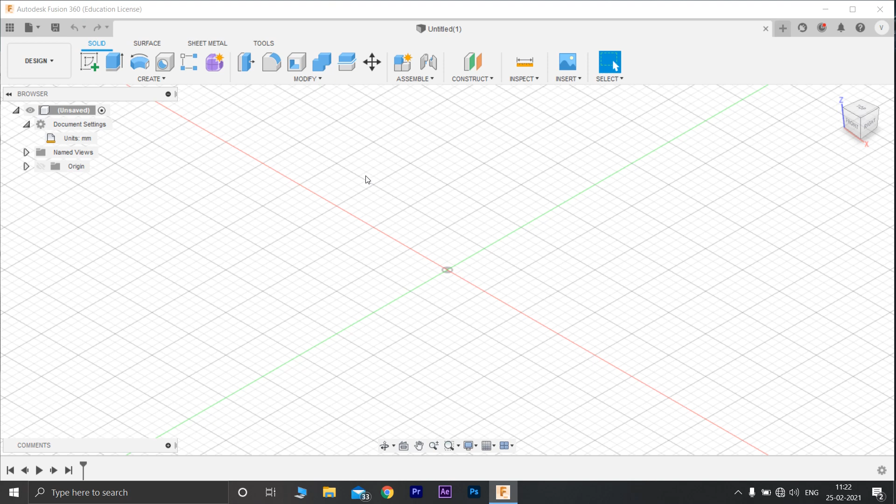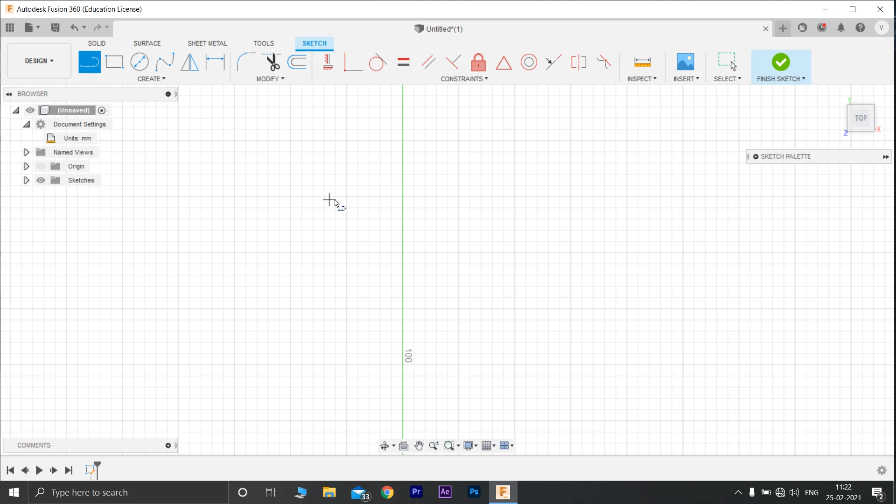The first setting you have to do is go to document setting and check whether the units are in mm. Now go to create sketch and select the top view, and move to the point above the center point. Next, go to line and create a simple sketch like this. Press escape and do the same process on the other side.

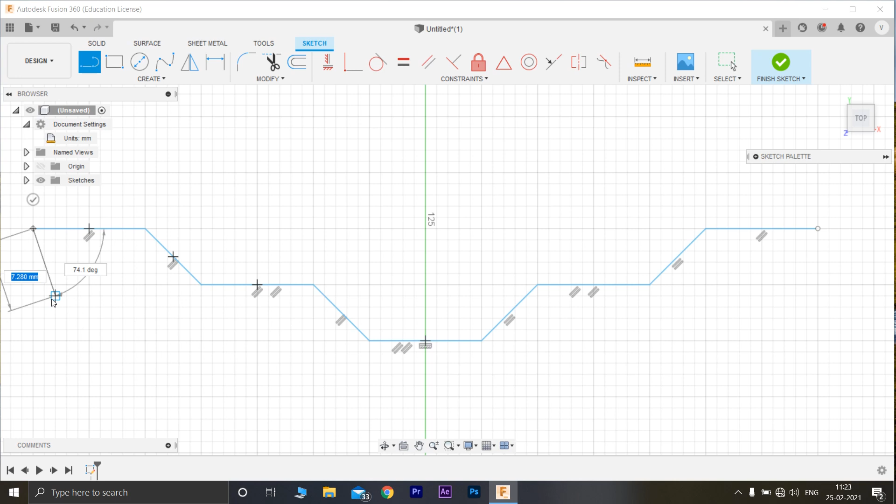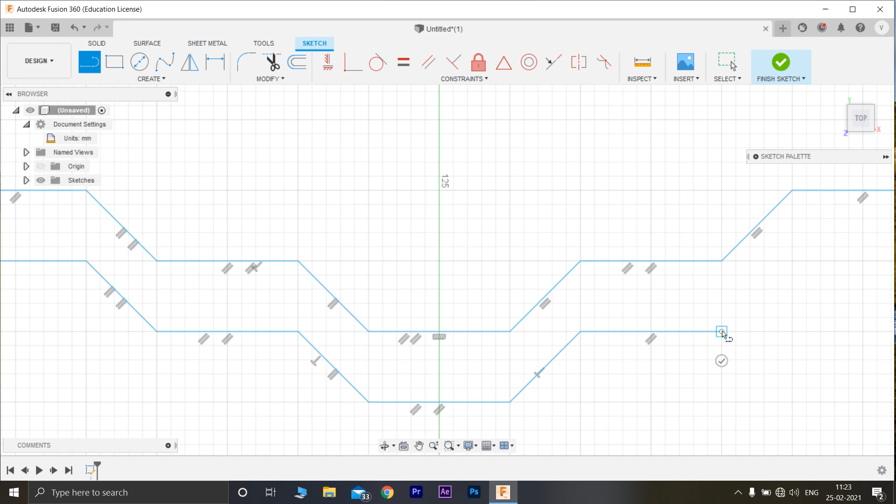Just repeat the pattern you did before. So what you have to do is go to revolve. The entire profile is selected. Now you have to select the axis of rotation, so you give this red one, that is the x-axis.

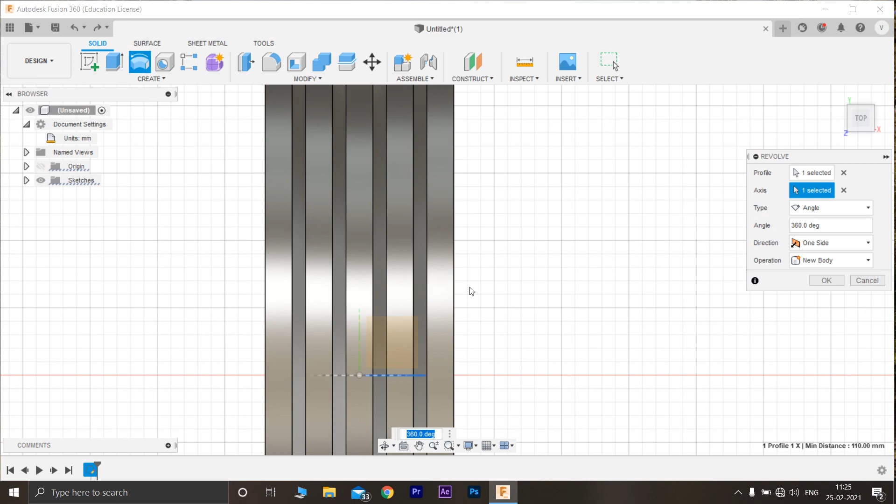Now you see the rim is created. So the outer alloy is now created. Yes, now the outer surface of the alloy is created. This is the top view.

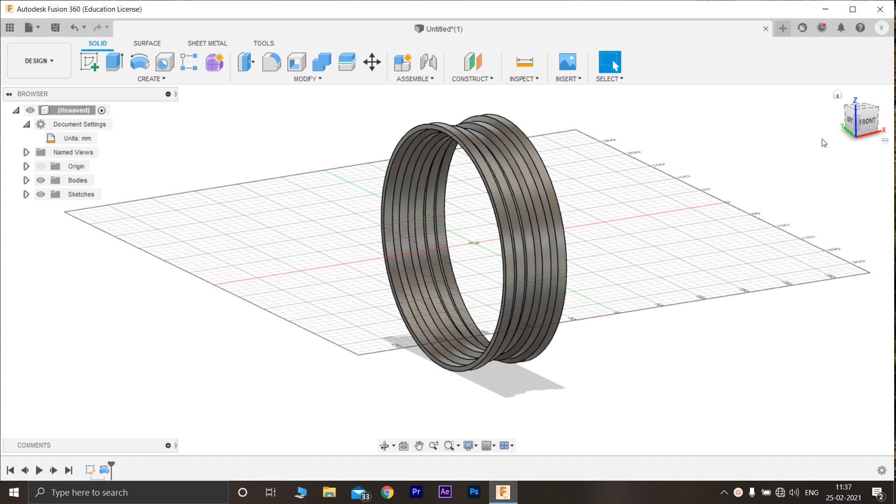Now what we have to do is design the inner parts. So go to front view, and go to solid and create sketch. First select the front view, that is this view, and now go to create and arc, 3-point arc.

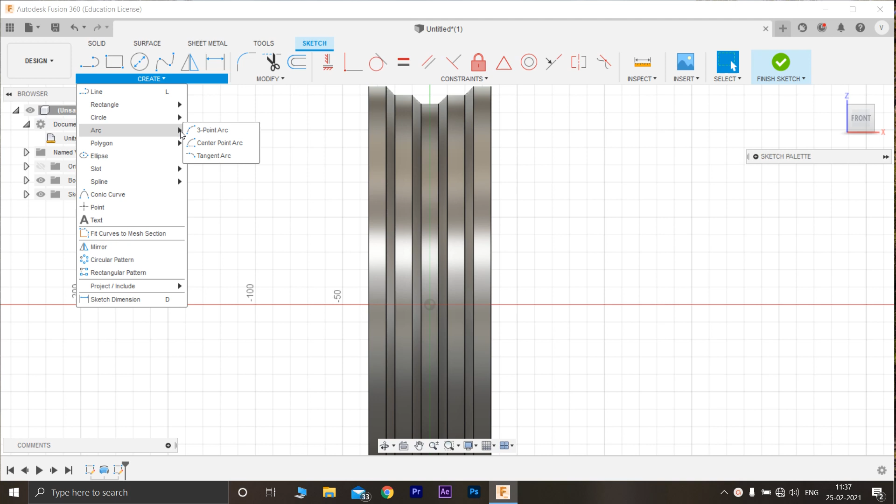Select this point, and now the center point will be -- don't give it too much so it won't look nice, so give it like this, the center. So the arc will be like this.

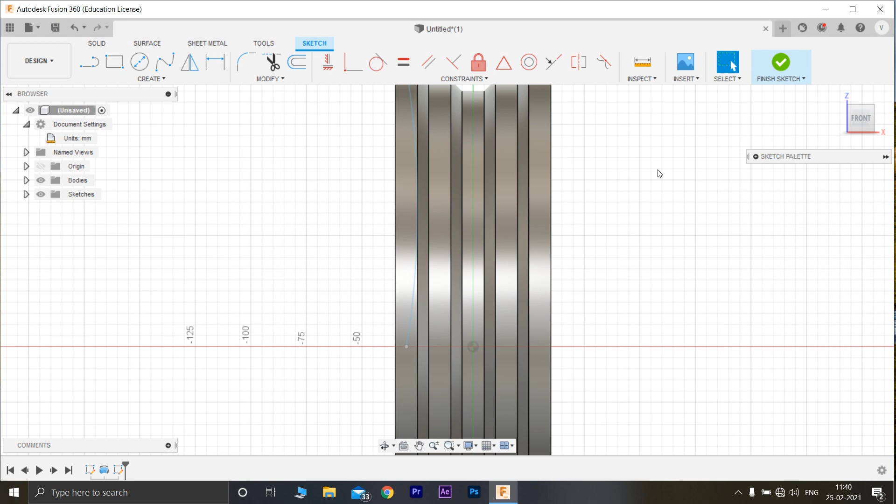So the next step is go to simple line, and draw a simple line like this and connect it, and press enter.

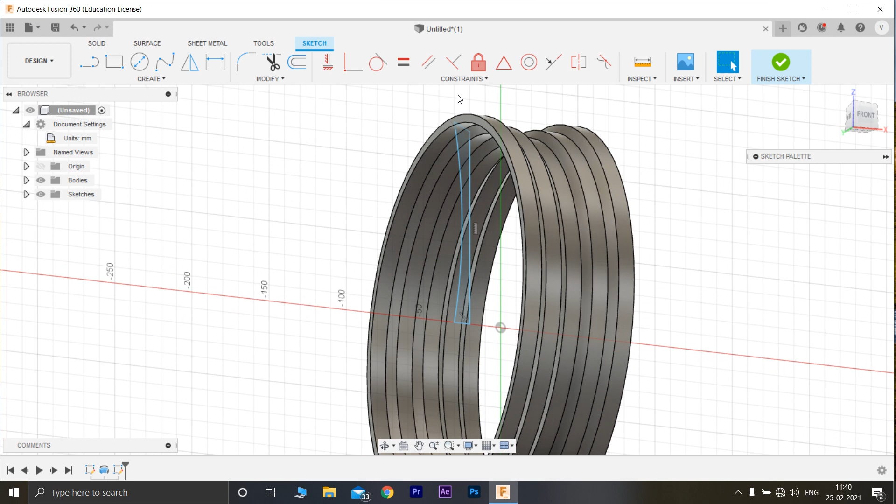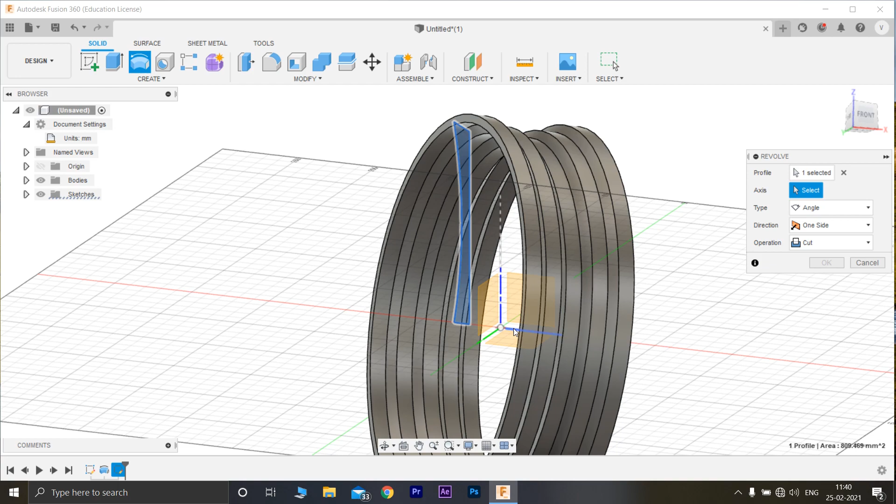Now select this part and go to revolve. The surface is selected. Now we have to select the axis of rotation, this red line, so that will be like this. In the operation you have to give it as new body. So see that it will be like this, and OK.

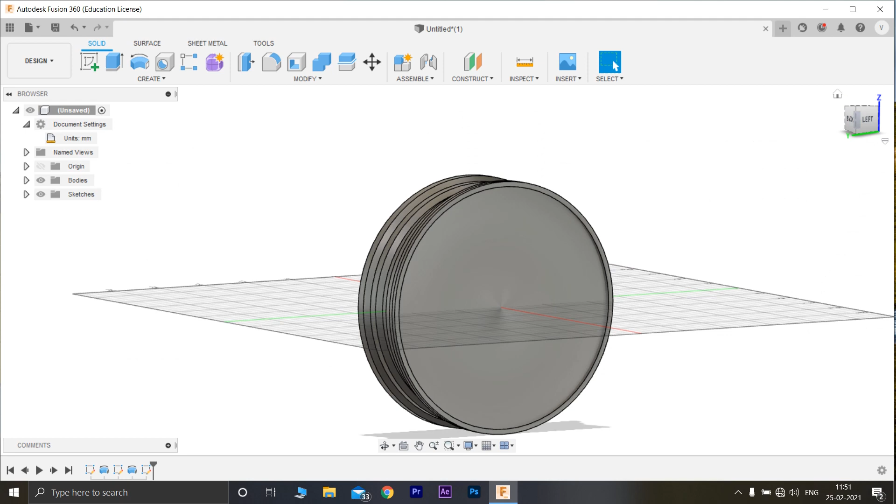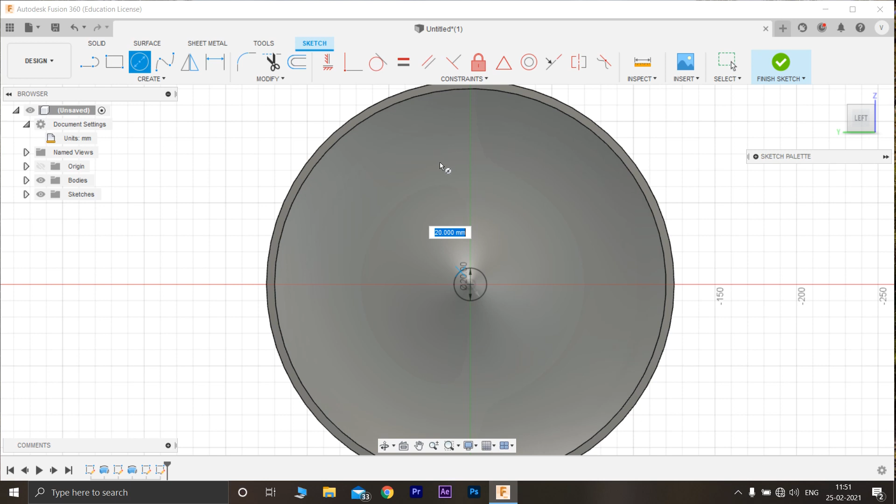Now go to this view and create sketch. I'm going to sketch on this view. Now go to circle and select the center point, and draw a circle for 20 mm. Now again go to circle, select the same center point and draw a circle for exactly this amount, and press enter.

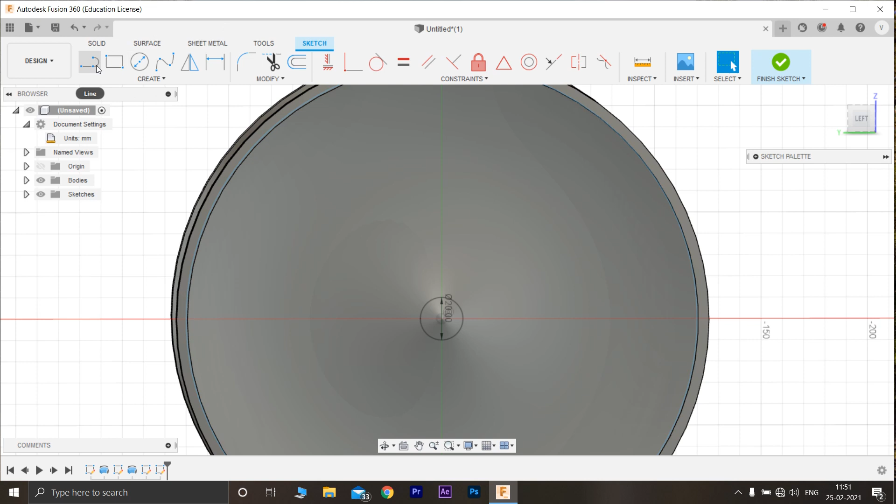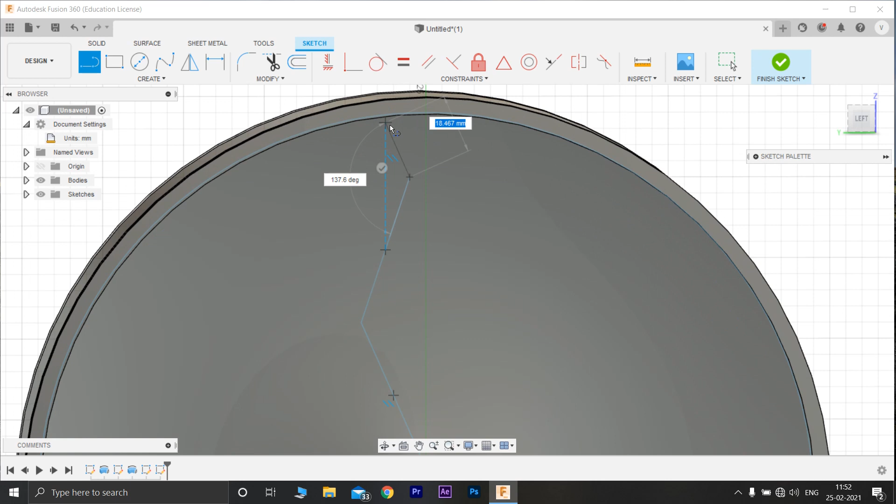Now the next step is go to line, select this point, and create a random sketch for the line. Press enter.

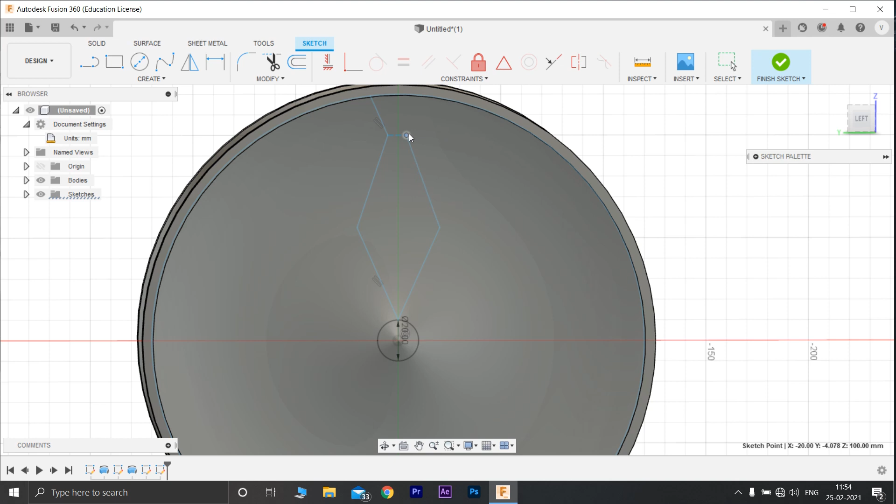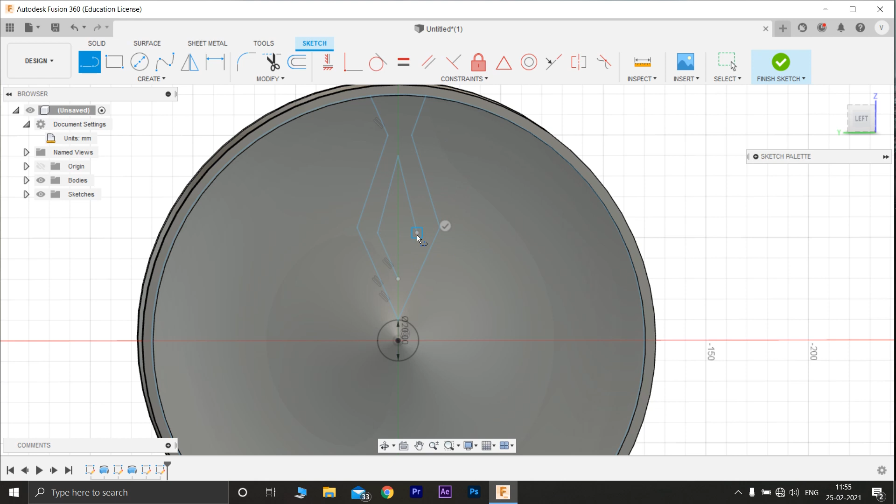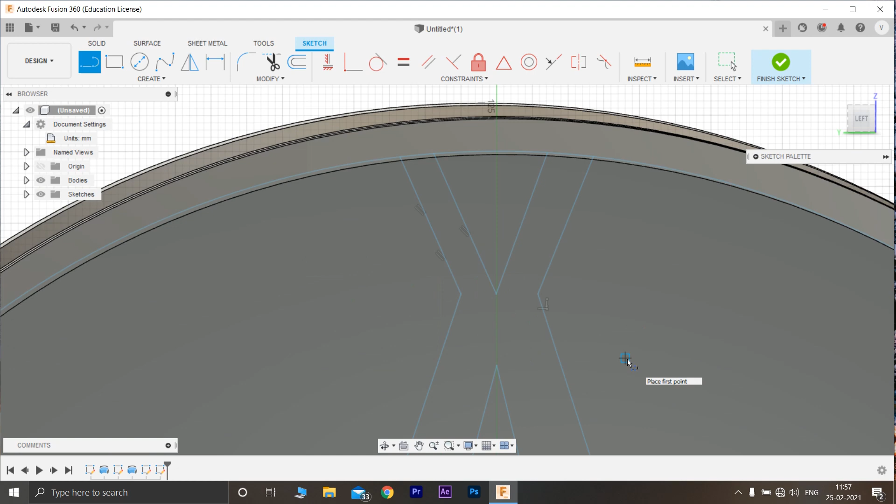Create a sketch like this. Now the next step is go to create sketch, select one point, go to line, and do it like this.

Now the next step is go to finish sketch. Make sure that these lines meet the outer circle so that it will be easy when you do an extrude.

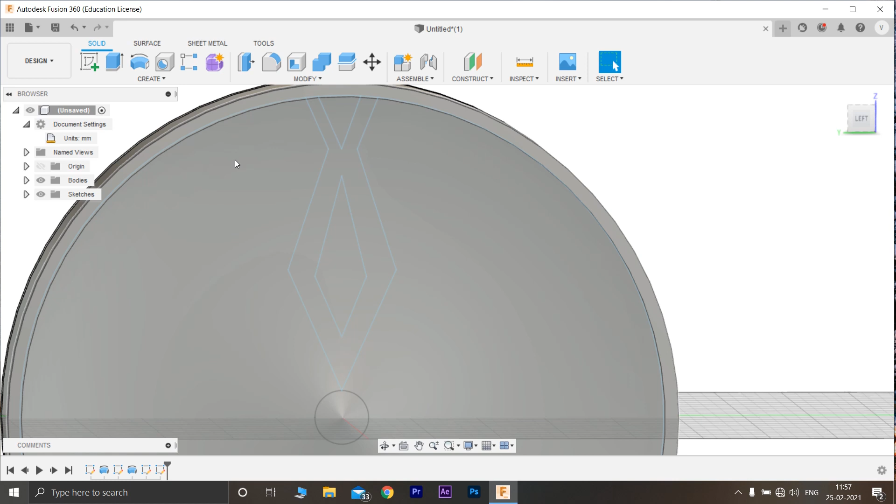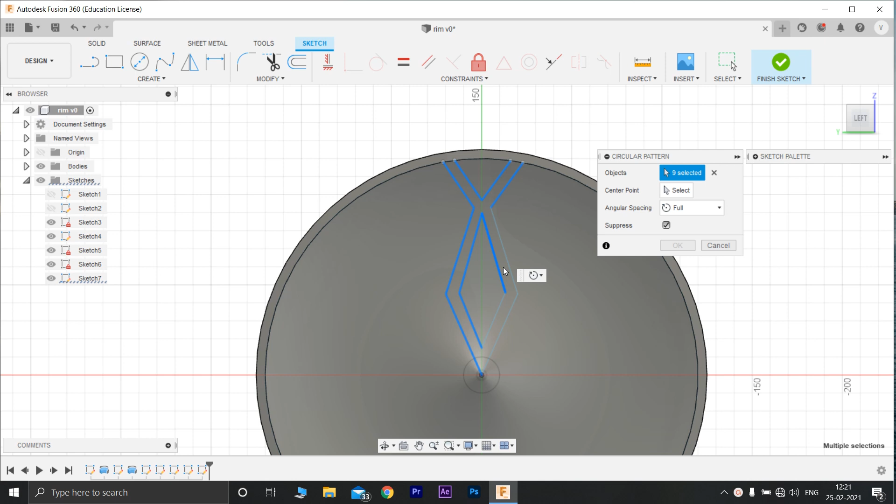Now the next step is go to create and select circular pattern. A pop-up will open like this. Now select the object, select all the lines that you have created. So now the circular pattern of 6 quantity is created.

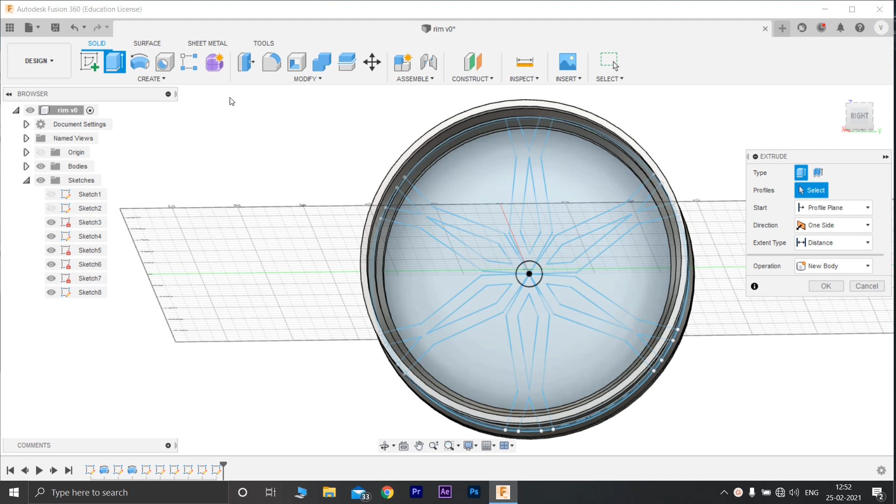So the next step is go to finish sketch and go to extrude, and select the surfaces and profiles that you want to remove.

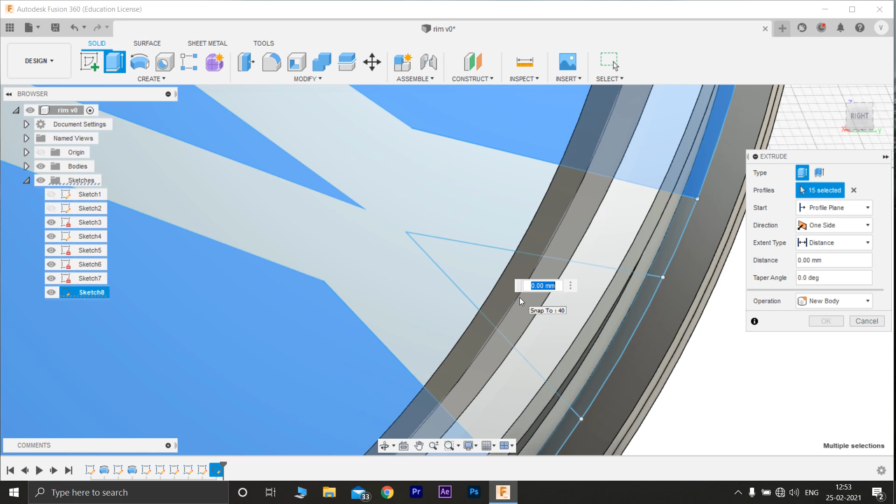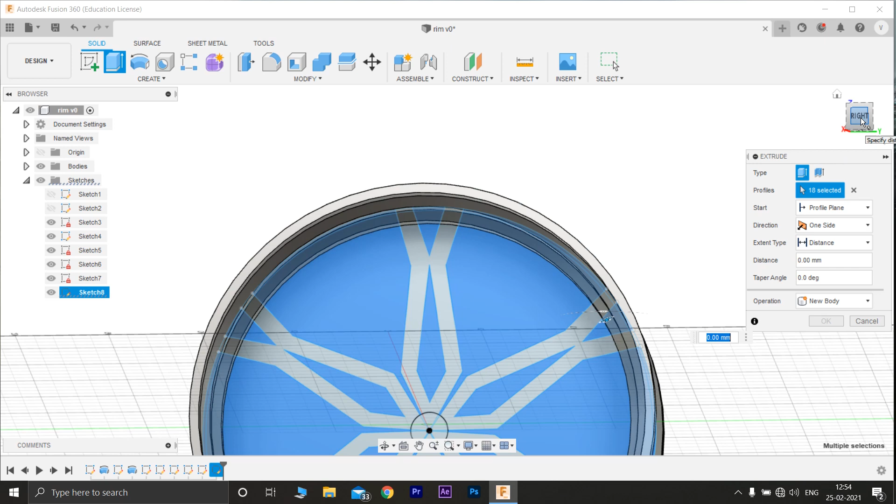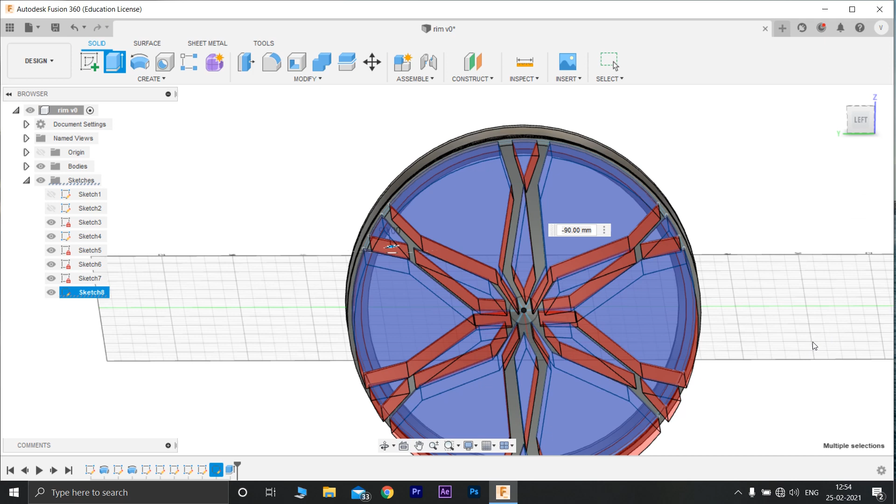Once you select all the surfaces, you have to set the operation as cut and extrude it outwards like this. Press OK. So this is how it looks.

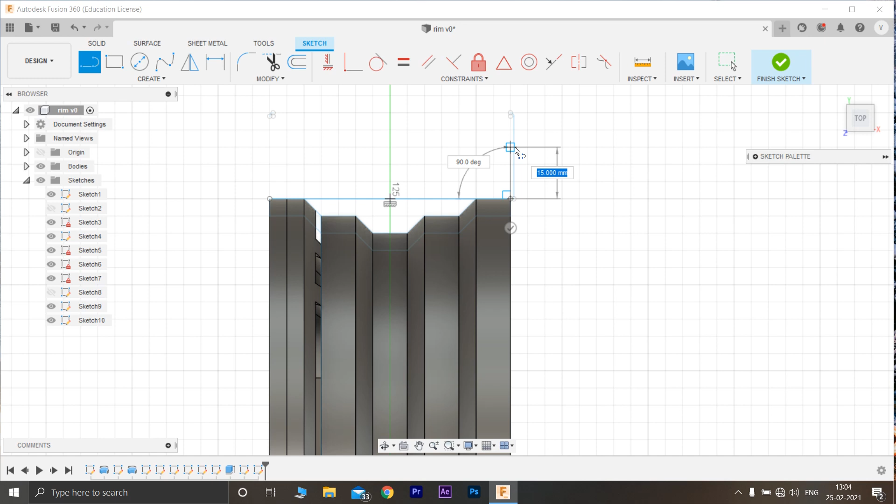Now the next step is go to the top view and go to create sketch and select the top plane, and go to line, and from this point to this point create a line, and again create a line like this. Press enter.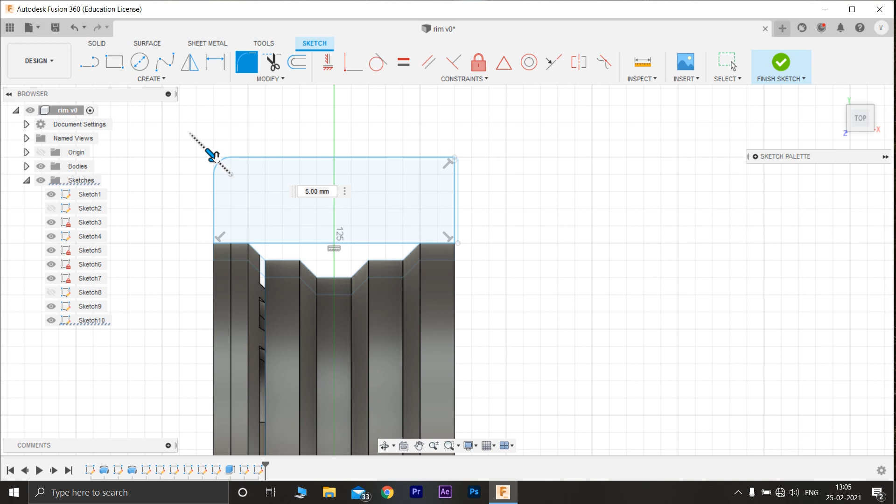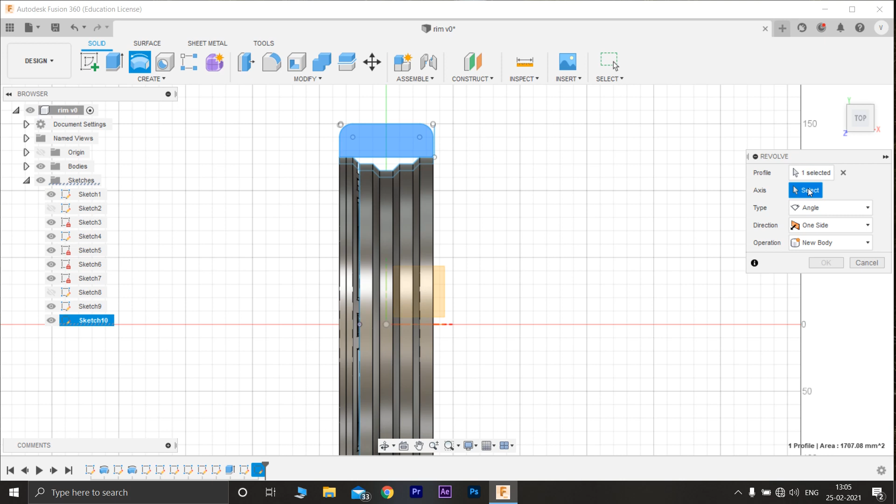Go to fillet and select this plane and apply fillet. Press enter. Now select finish sketch and go to revolve and profile, select this one, and the axis should be this red line, that is the x-axis.

Press enter, so the surface will be created like this, and you can give OK. If you want to increase the size of the layer, press pull.

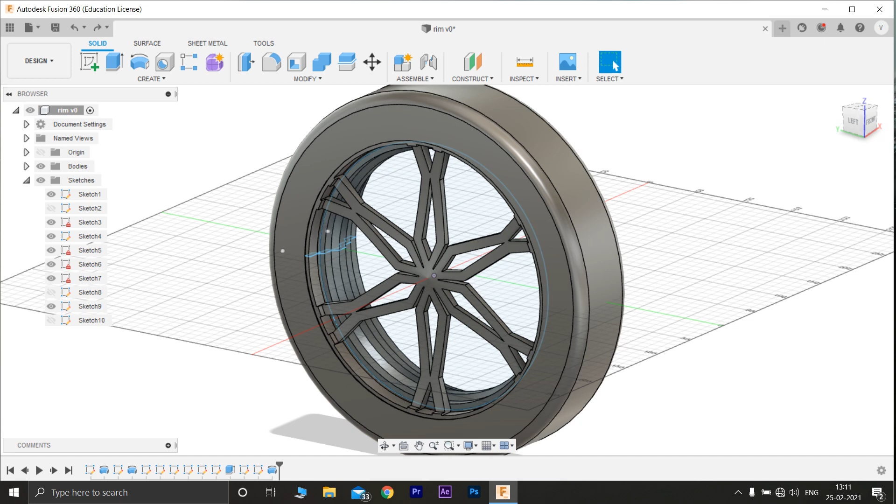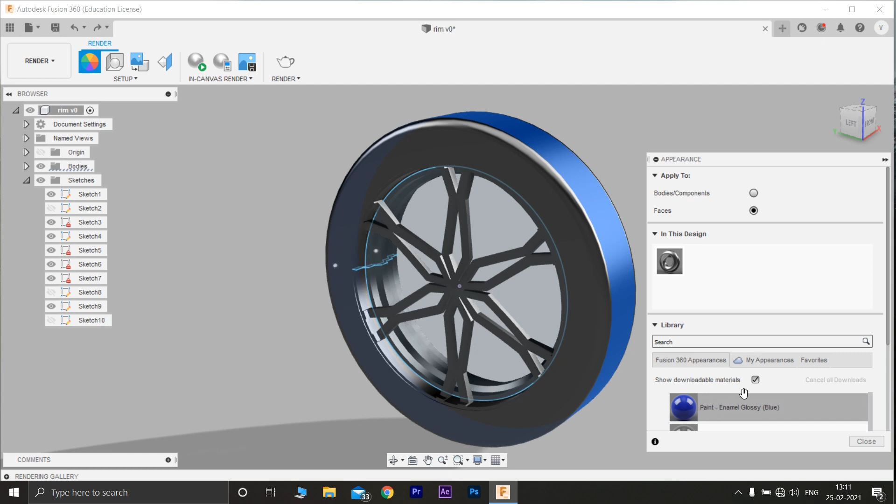Now the next step is to give it the paint. Go to render, right click on this, go to appearance, select the faces here, and go for enamel glossy black on these faces, repeat it over on all the sides.

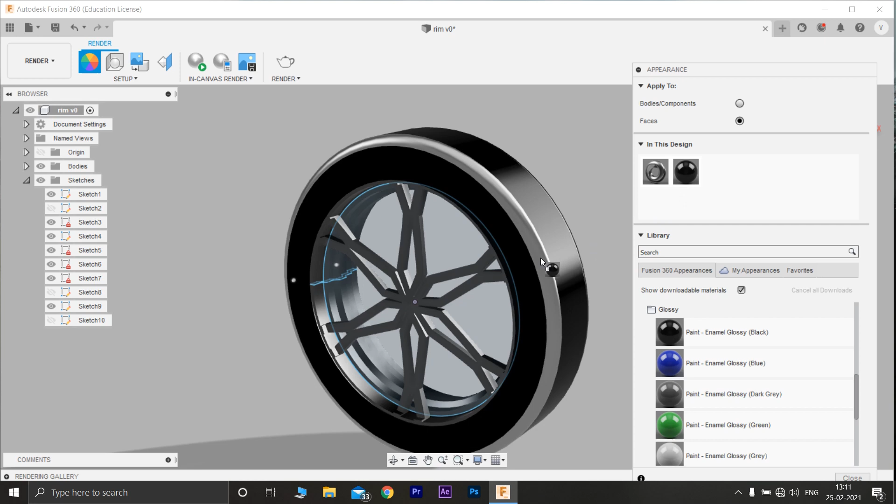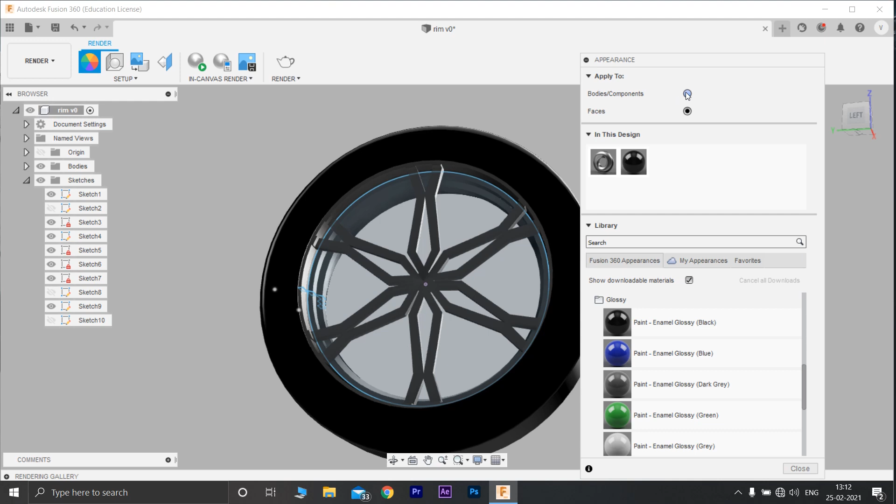On this rim part you can give any color if you want. You can give it as blue, change to -- you can give even red color, or you can give yellow.

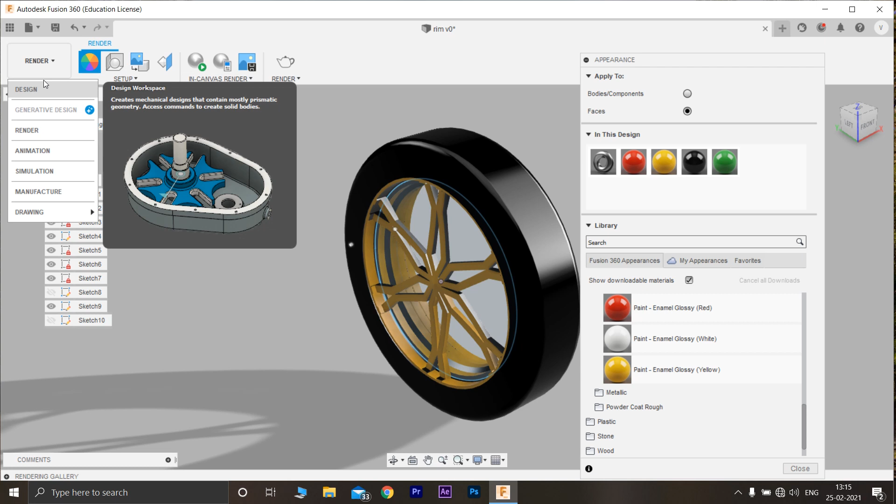Once the appearance is given, this will be the final outlook. That's how you design a wheel using Fusion 360. You can use this for 3D printing and make a wheel for an RC vehicle.